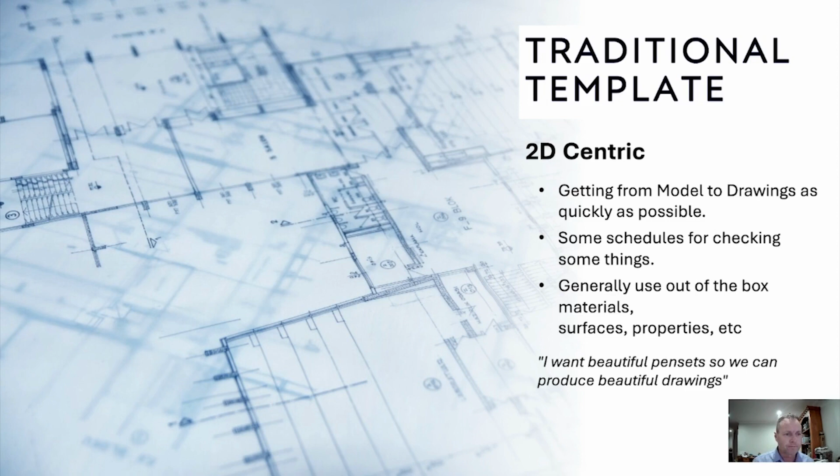The other thing I addressed while working through this template redesign was the actual architectural process. I found as a foreigner, working in an office in a foreign land in a strange language, that finding information about a project was difficult. So one of the goals I had with our template was to bring all of the information into a place where we could find it and it could be accessible, so we weren't spending a lot of time trying to confirm what something was while working, so we could just carry on and get the project through as quick as we can.

So the typical architectural process is quite drawing focused. You always hear architects telling us, draw this, draw that. There's never any model this, model that. It's all about the 2D output.

The information is quite often dispersed. It comes in emails, it's in notebooks, it's in team chats, it's in the project architect's head. There's probably a conversation on WhatsApp. There are numerous places where little pieces of data for a project come in, are stored, and then quite often lost.

So when you want to know what's gone on, or what status of a particular element or item or material is part of the building, it's often a case of hunting through email threads and trying to find the thread that mentioned it, or where you confirmed it, or going back through a Teams chat and trying to find out who were you speaking to? Was it in a group chat? Was it in an individual chat? Who told you this, what the answer was?

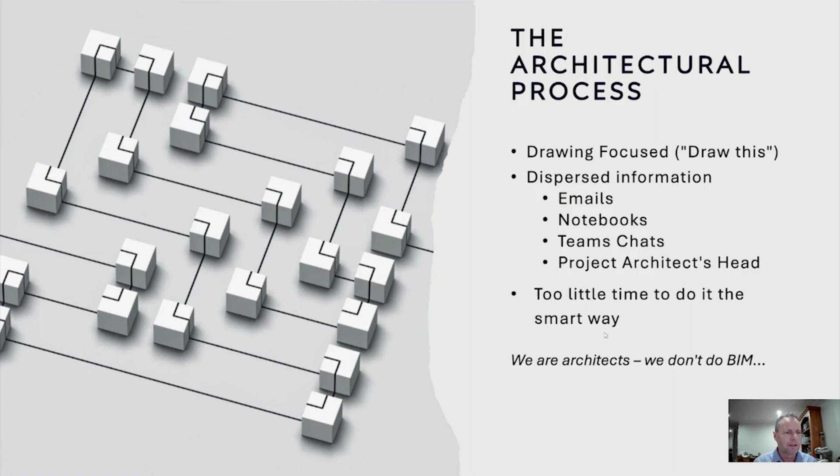And the other sort of statement we would quite often hear from our architects is, we're architects, we don't do BIM. So BIM is quite often seen by architects, not all of them, but it seems to be a lot, as something extra to architecture. So we do architecture and then we do BIM, rather than using BIM as the way to empower our architecture and to empower the design process. So those are all the basic concepts of what I've tried to encompass in our template.

So how can we BIM better as a start? How do we start the process to do better BIM, to enable us to use BIM as a tool that informs us of the design during the design process?

So first of all, I think it's time to start thinking in terms of modelling. We always hear, draw this, draw that - there's never a reference to modelling. So I think it's time we need to change the thought process from drawing to modelling. Let's focus on the modelling. As long as we've got everything set up well in the background, the drawings will take care of themselves to a great extent. We're not going to get them 100% perfect out of the model, but if we model well, we'll get a lot of what we want out of that into the drawings, and then we just have to touch them up.

The second one is to use the model to inform the design process. So let's put the information into the model. Let's not just build a model that we use for producing the 2D drawings, but let's get the information in there, the data that we need, the data that we know, so that anyone can jump into the project and see what is happening and understand the building a lot better, a lot quicker.

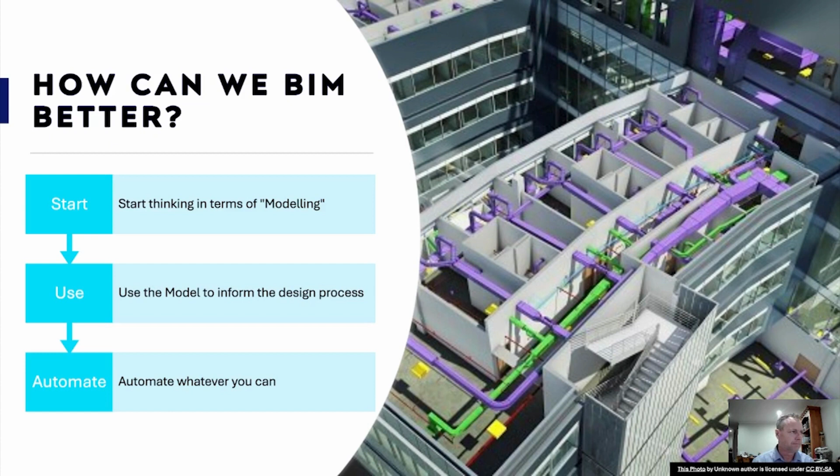So I set out with the design of our template with three core tenets of what our Archicad BIM template would do.

The first one is that the Archicad file would be our primary data repository for the project. Whatever data we had available on the project should be accessible in Archicad the moment it becomes available—things like materials, surface finishes, once we've made a decision on a supplier, color, or brand, we should be able to tell what that is easily within Archicad. It shouldn't be something we're putting in all of the time for every element, which also opens the door for errors. So we should have a place where we can manage that information, and then it gets pulled through the project as we work and develop the building.

The second one was that the project file should be used to analyze basic requirements and automate basic tasks. We could be checking for things along the way that are simple enough to do in Archicad with the right expressions and graphic overrides. I know there's programs like Solibri and BIMcollab Zoom that we can export files to and run checks on, but if we can do that in Archicad as we're working through the process, it saves time. It saves the need for dealing with another piece of software, and saves the hassle of converting to IFC, exporting, opening, doing the checks, then coming back and fixing whatever needs fixing. So this is a case of using Archicad to do whatever we can before we need to go externally.

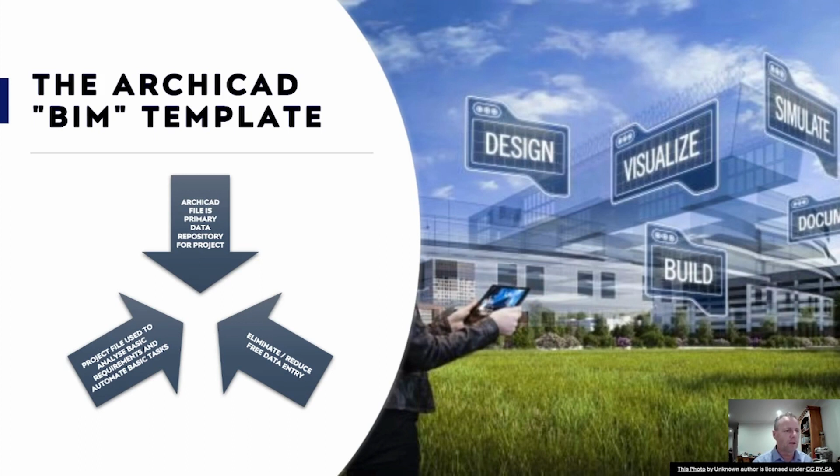So how are we going to use Archicad as our primary data repository? First of all, I looked at smart naming of material. So that was a case of not just using the standard Archicad naming convention. It might be glass, or it might be blue paint or something like that. It's renaming the materials or developing materials with names that include a number of data points within the name.

This is just the way that I've dealt with it, there's all sorts of ways you could deal with it. In my example, the first data point is a code to distinguish that material. The second data point is a description of what the material is. The third data point is the brand, the supplier. And then the fourth data point is the actual code for the color.

So what that allows us to do is evolve the information that goes into the materials as the project evolves. It also allows us to extract parts of that name out and use in different areas. So maybe during the concept design phase, we might only want to know what the code is and what the description of that material is. So W01 might be a wall that's painted white.

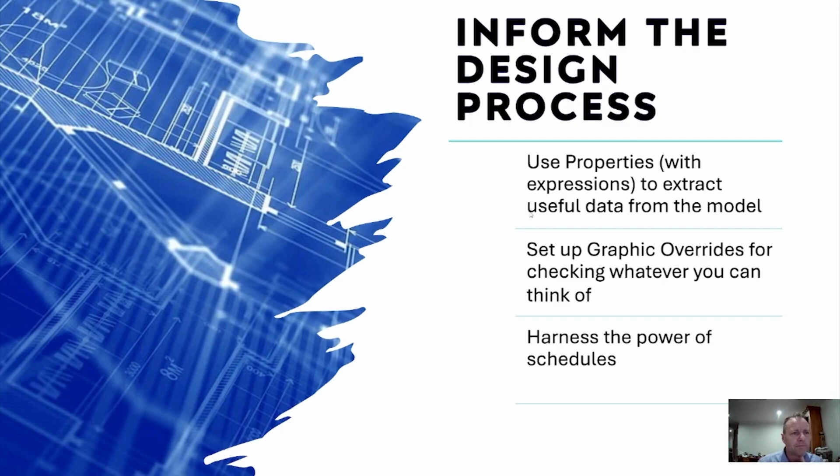And then the last one of these was to eliminate free data entry. As I said, people just entering data ends up with lots of different versions of the same thing, which, when you're in a hurry wanting to extract some information, is always a pain that you've got to sit down and try to fix it all up.

A lot of this especially comes from the principle that we didn't want the BIM manager to be the guy who fixed all the problems. We saw the BIM manager's role as guiding the design process or guiding the modeling process, the digital aspects of the project. So by eliminating all those friction points, the BIM manager can concentrate on creating a great model rather than fighting fires all the time and fixing up everyone's mistakes.

Because you can be sure as houses that if you've got more than two people working on inputting the same sort of data, there are going to be mistakes, even if it's just a simple spelling mistake or a capitalization mistake. They happen.

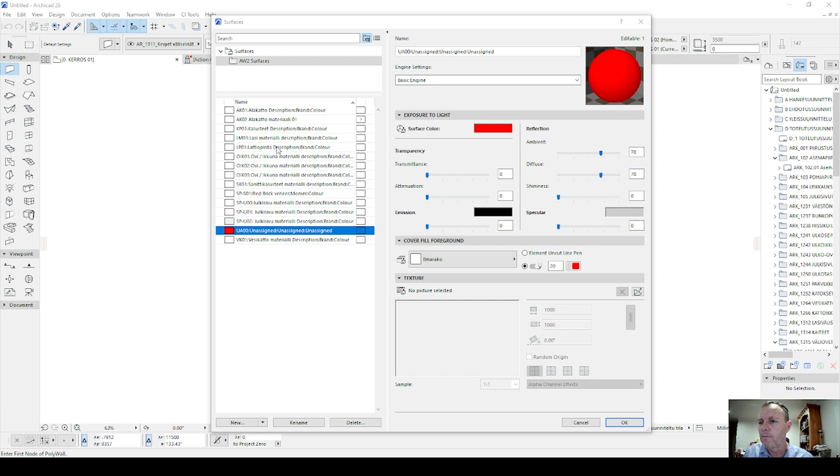Okay, so here we're going to take a look at the surface materials and how we've set these up. What we've got here is a range of white materials, all with a different name relating to different parts of the building or different surfaces - wall materials, floor materials, ceiling materials, glass, furniture materials. And then they have a naming structure made up of 4 distinct parts.

So this is an exterior material, and we've got a code which we've come up as SP-UJ00. The 4 parts are just the material description, the brand, and the color. So what we'd do is create the amount of materials that we're planning to use in the project. If we're going to have an exterior facade with 3 or 4 different materials, we'll create 3 or 4 different materials which are basically all duplicated, except the code will have a different number at the end, and they'll all be white with no surface color, no texture, and no cover fill.

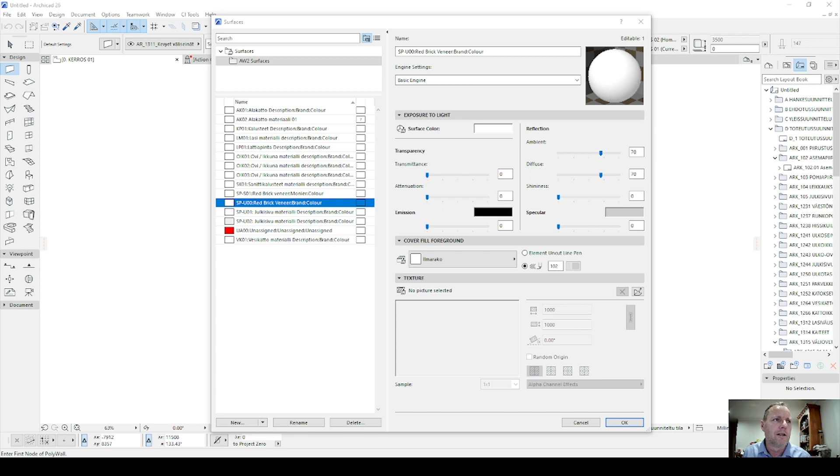And then as we go through the project, we'll start populating this information as we make those decisions. So once we decide that SP-U00 is going to be, say, a red brick, we'll come in and change that part of the description, and we'll say it's going to be a red brick veneer. At this stage we don't know who the supplier will be or the actual color, but we're going to go with a red. And at this point we could also start adjusting our surface colors and giving it the surface color we want to have.

A bit more red. And we could add the cover fill, and even choose a texture if we wanted at this stage, but maybe we're waiting till we know the exact one so we can add the exact texture later. Then as we work through the project and discover who we're going to use for the bricks, we might decide this is a Monier brick. We just enter that in the material description and leave it at that, and then that goes through the whole project. So anywhere we've assigned that material, we know it's a Monier red brick veneer. The only thing we don't know at this stage is the actual color code, but we can add that later on, and we just repeat this for all the materials we're going to use.

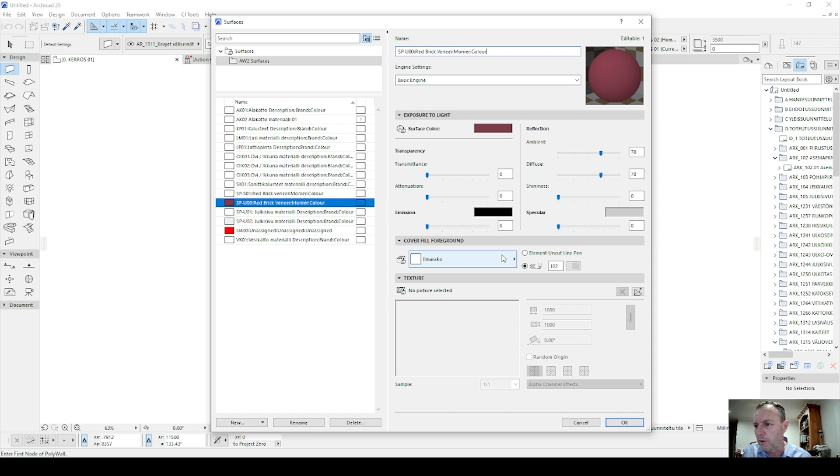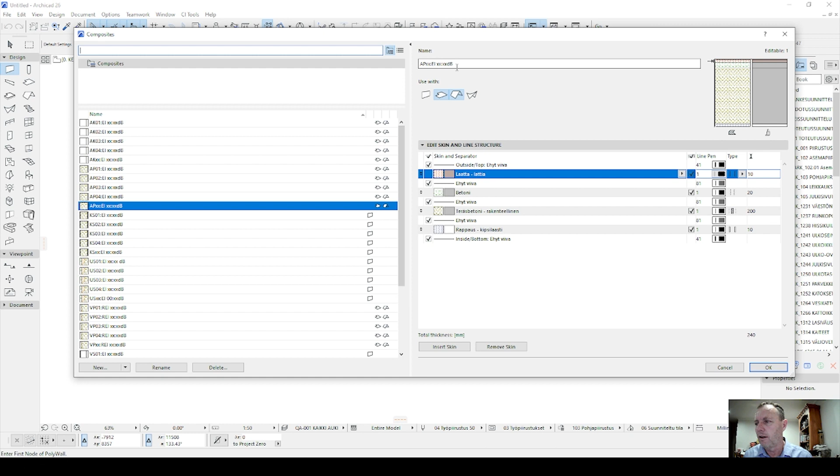And so we do the same for the composites. We've set these up with a similar naming structure, but here it's only got 3 parts: a code, a fire rating, and an acoustic rating. We've left the actual numbers as X's until we've decided those points, or until we've been told what they are by the engineers, to indicate that they're undecided. Then as we decide those, we put them in, and that carries through everything we do in the project later on.

So once we've got these naming systems in place, we can come into our properties and set up expressions to extract information out of those names, and then we can start using that information for various things. So let's just go to the wall one.

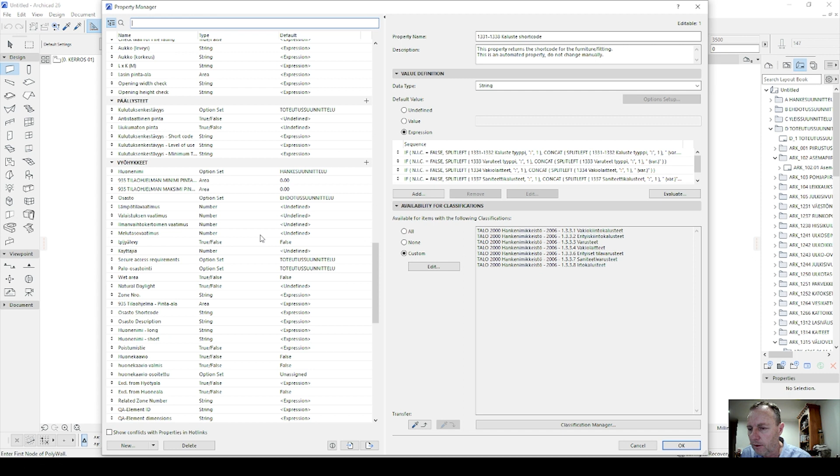Where are we? Surface materials. So here's a property that is going to generate the material type shortcode for all exterior surfaces.

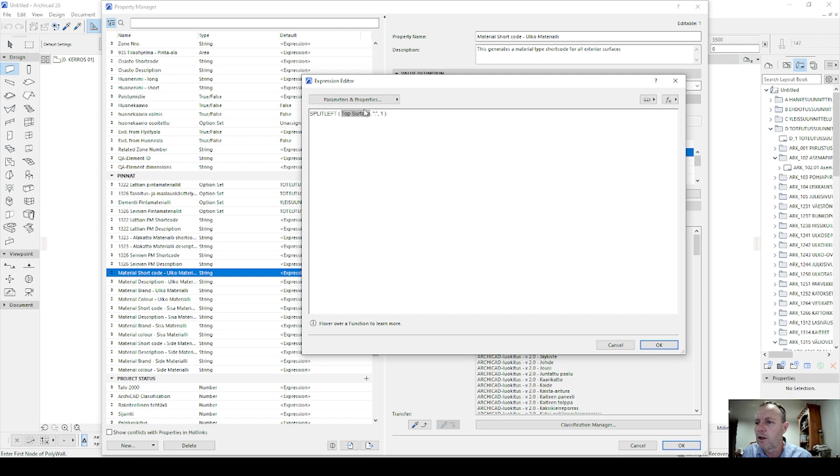So we tell it that it's an expression, and then we've got the expression down here which is going to look for the top surface of a slab. It's going to split that at the colon and take the first part of that text and return the result.

We've also got various other expressions down here which are looking for the same result but from different types of material, different types of elements. Every different type of element needs a different expression, because these are calling them from the standard Archicad parameters for those elements. So Archicad basically goes through this list until it finds one of these expressions that relate to the type of element you are trying to get this code for.

A thing to remember with properties is to make sure you don't tick the 'all' box when assigning them to classifications. It might seem simple, might seem the easiest option, but believe me, it creates more hassle than it's worth down the track.

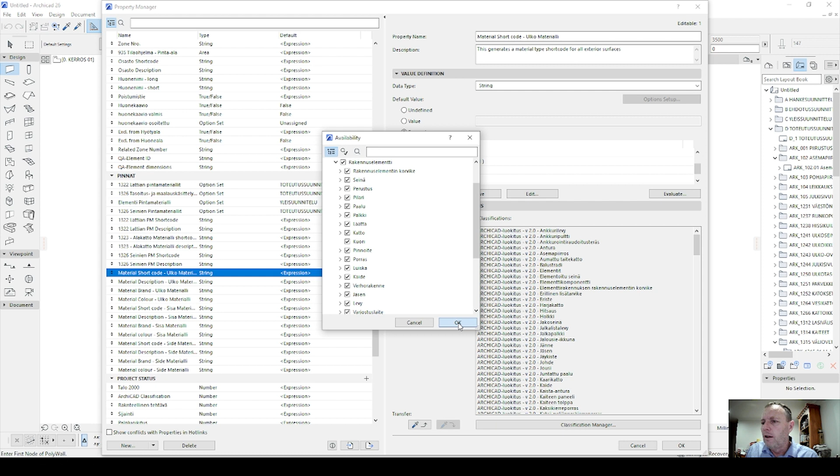So choose the custom one and then come in here, edit, and only choose the actual classifications that you want that property to be assigned to. What that does is means that when someone jumps in the project and opens up a wall or a floor or whatever it is, it doesn't give them a huge list of properties, half of which are irrelevant, which would get them confused and not enter any information into the property.

So then your properties become worthless. At least if you assign your properties carefully to the right classifications, you then know that all your properties assigned to an element are actually valuable and do something in the project.

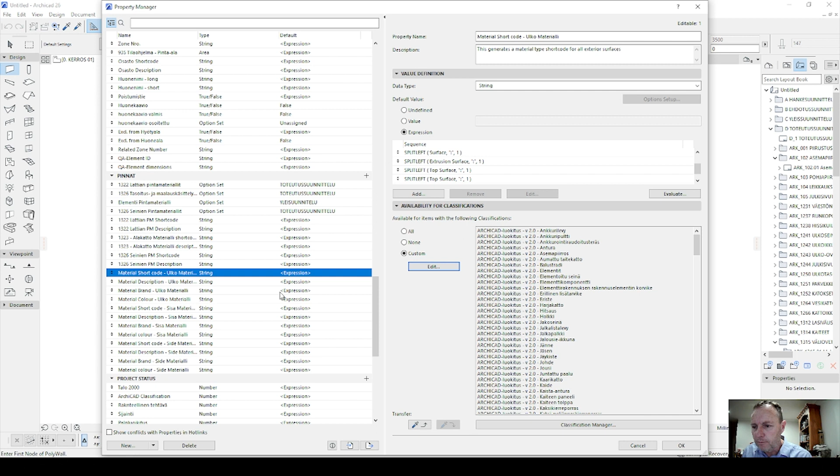So if we then go up and look at the option sets properties, these are the properties we've created which reduce the need for free data entry. We looked at our projects and said, what's the information we're constantly repeating? If we're always repeating something, we put it in an option set, which reduces the opportunity for errors in entering that data, and we get a consistent output.

What it also has allowed us to do is add some guidance into the project. So the first property we put on the list in an option set is the stage of the project where that property is relevant - whether it's concept design, develop design, or construction drawings. The default text isn't undefined, it lists the stage of the property, so you can go through your properties when you place an element and see which ones you need to address now or address later.

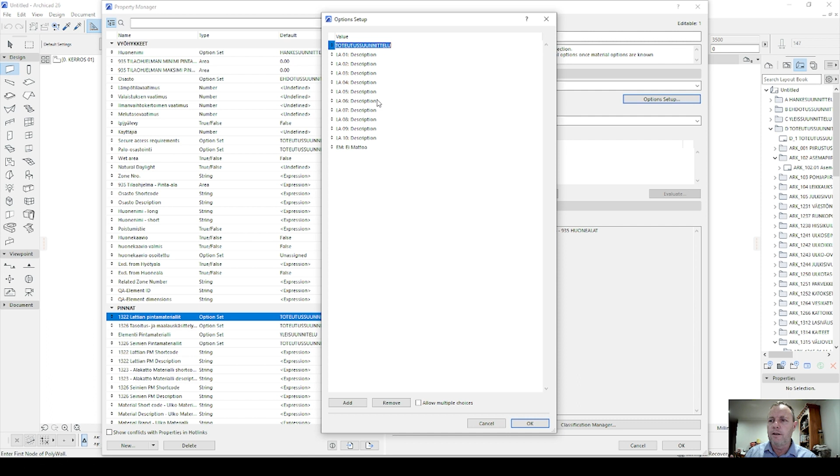And then we'll have a list of properties, usually with a short code and a description, so we can use these in our schedules and keys later on. We can put the short code on our drawings quickly, then quickly create a schedule. It will be created there by default, sitting on the side of the drawings, and populate as we add options to our drawing.

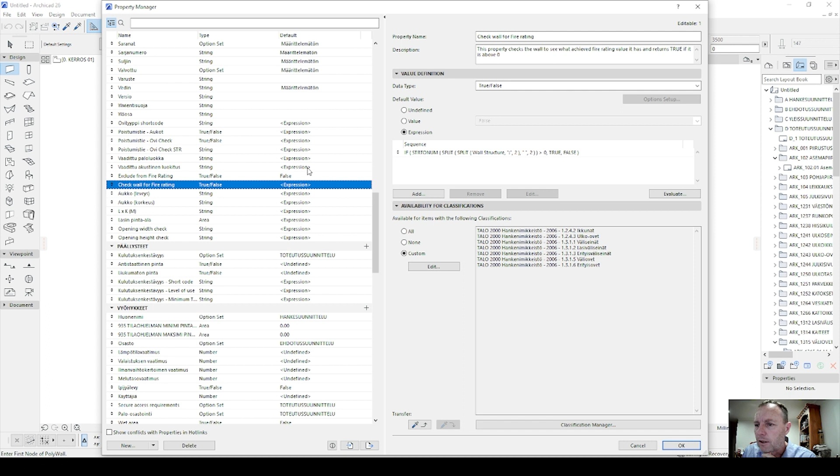We can also do some calculations and stuff through these properties and expressions. For instance, here we can check the wall for its fire rating properties. So this is going to look at the wall structure, the composite type, split it out, take the second one, check a few things in here, and return a result for us.

Now these all look rather complicated, and they can be at times, but they generally are as simple as an Excel formula. So you start off simple and work your way up. Find something you could do with your expression, and then build your way up until you get into these more complicated expressions like this, which are checking things, splitting things, and converting strings to numbers.

Comparing it to, is it above zero, basically, to return a result. So you can run true/false operations on elements. You can do mathematical functions on elements, logical functions. So if something meets a certain criteria, it will then return this result. If not, return this result. Or if something is this or that, do this. Those sorts of equations, mathematical functions, sums and square roots and all those sorts of things.

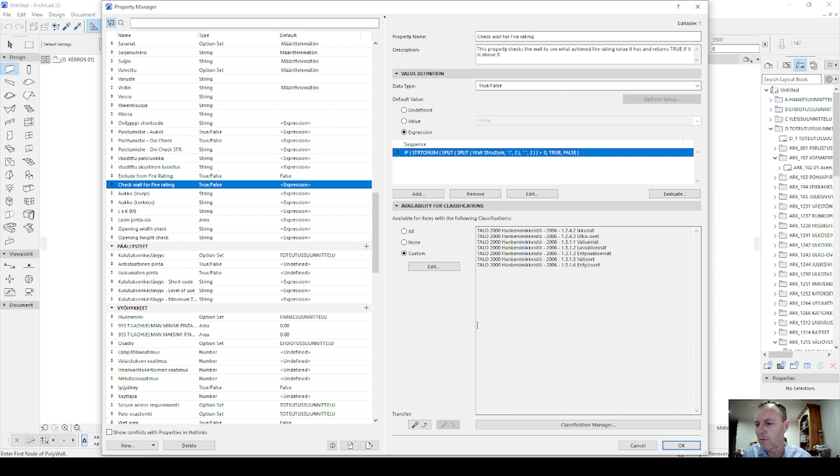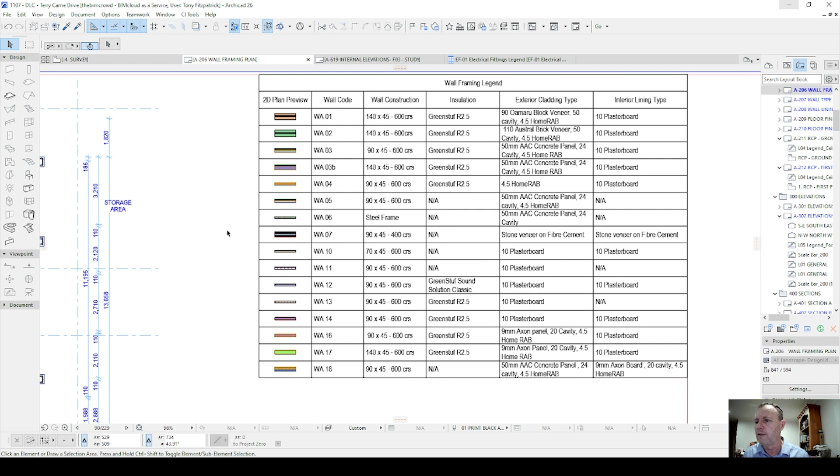So if we take a look at a live project here and see something we've done, here is a composite. We've created quite a complicated composite name comprising the wall construction type, the framing, the insulation, the exterior cladding, and the interior lining type. This is just a house, so we weren't worried so much about fire rating and stuff.

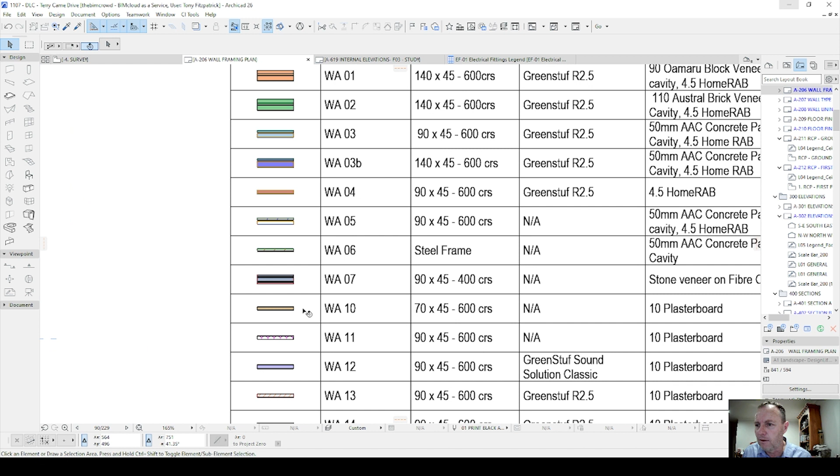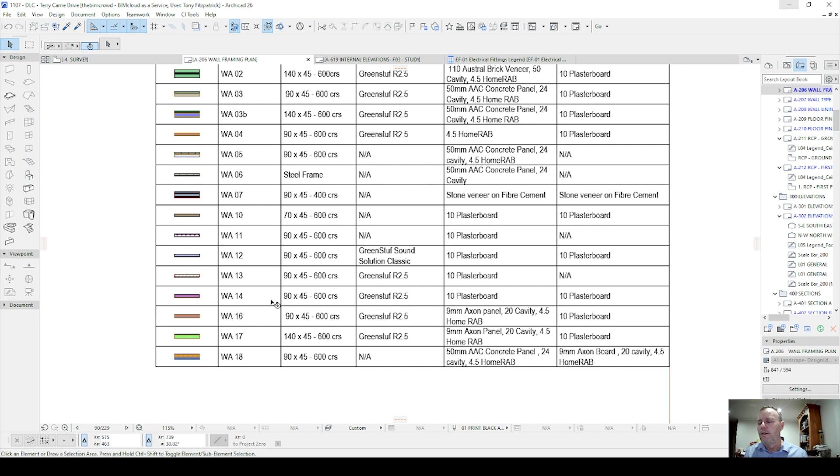And then we've used graphic overrides to turn each type of wall a different color. So then we can come here and go to our plan. We can see by color, go back up here and see what that wall is. Pink wall, so this is WA14, 90 by 45, 600 centers for the studs, Greenstuf R2.5 insulation, 10mm plasterboard each side. That's all produced automatically by Archicad.

We haven't had to manually type out the schedule. We haven't had to put any fills over the walls or all those time-consuming things. And then if we change anything through the project, it updates automatically. This is the beauty of using these properties and expressions, is that once you change something, as often happens during the design process, it carries through the whole project and updates all your drawings, schedules, lists, and everything you've got set up.

So, hopefully that is a good brief introduction to expressions and the power of expressions and how they can help you, and properties themselves, and how they can help you manage your Archicad project. How you can use your Archicad model as a real BIM model, so that you're using the data within that model to make informed decisions.